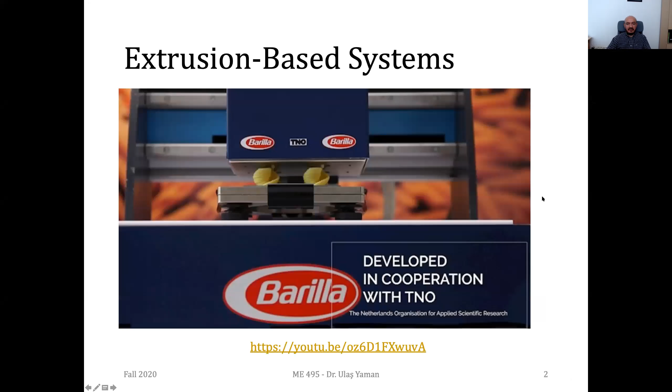We were discussing extrusion-based systems in the previous week and covered the fundamentals. We watched some videos, and I'd like to show you another one, a bit different from conventional desktop printers.

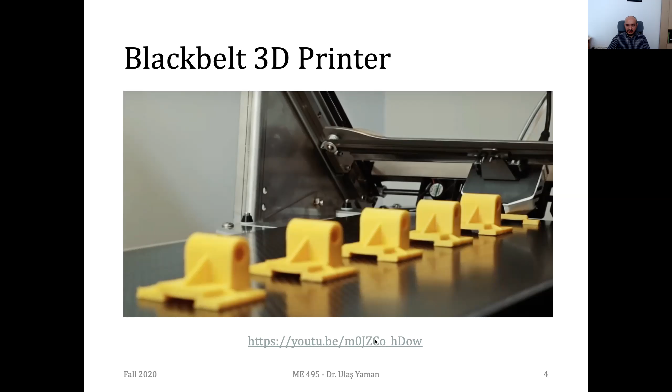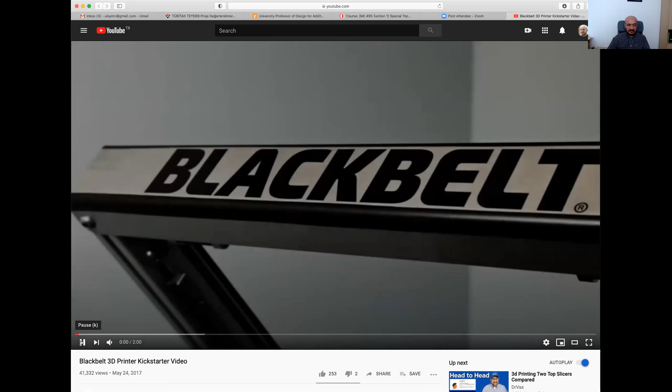2013, President Obama said, 3D printing has the potential to revolutionize the way we make almost everything.

This is actually the main difference: they don't have a conventional Cartesian X, Y, Z coordinate system. This is a bit tilted. This is again our extruder head, but this time it's not printing on an XY plane. It's printing on an inclined plane, about 45 degrees. The advantage is that the building plate is moving, like a conveyor belt, continuously in this direction, which means this inclined plane allows continuous material extrusion.

You can also see similar items here, the fans, which are for cooling. They have a special bed - I'm not sure whether it's heated or not - but it has special patterns so the material can easily stick to this conveyor belt.

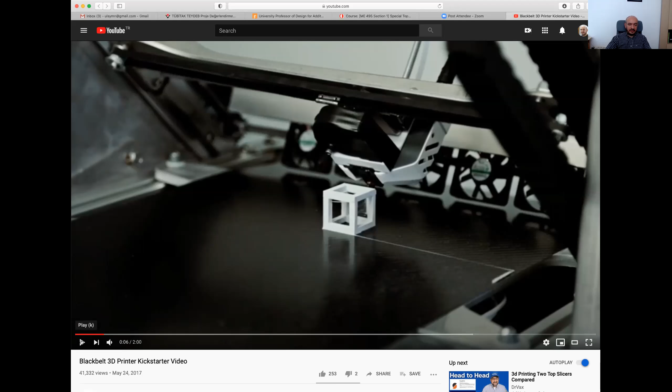Revolutionize the way we make almost everything.

Indeed, 3D printing has become a technology that will change the way we produce things. They can easily produce longer products since they don't have a specific build volume. They have some limitations on size, but for the length of the part, there's no limitation.

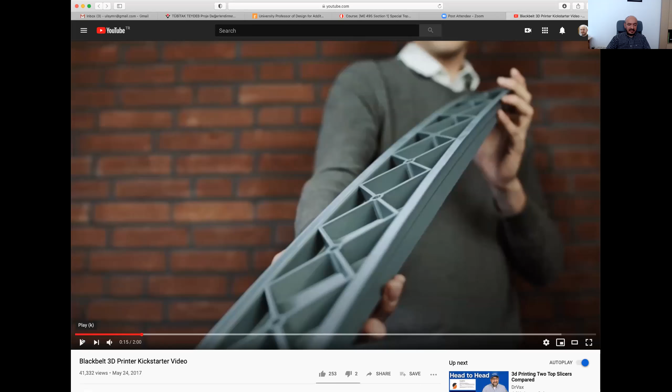However, there are still challenges that prevent 3D printers from entering the industrial landscape. Blackbelt 3D has addressed these challenges. You can assume this is their kind of X and Y axis - obviously inclined, but the fundamentals are the same. The main difference is on the bed side: it's moving all the time, not stationary.

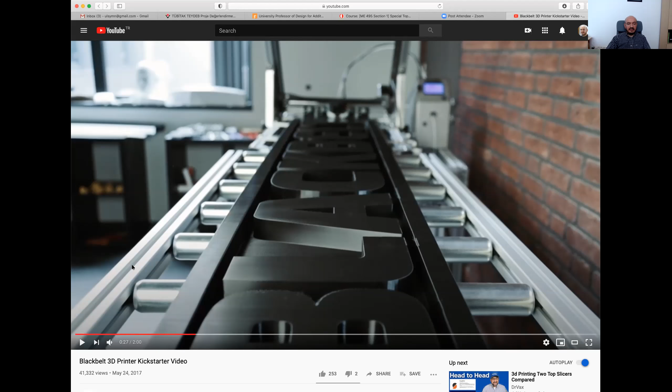Started from scratch to redefine. They have a huge part - this is their name, Blackbelt 3D printer. They printed this part in a single operation using fused filament fabrication technology. We are proud to present you the Blackbelt industrial production platform.

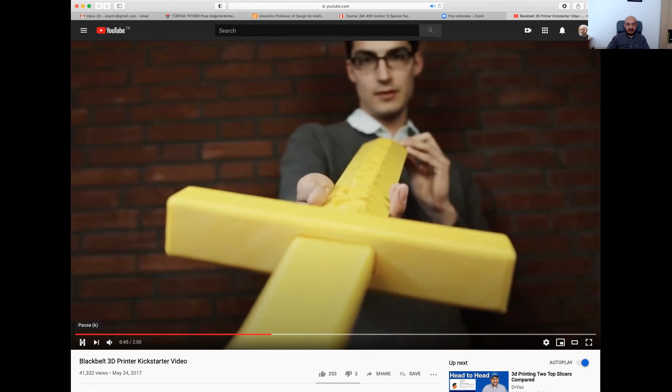But what is so special about this new printer? Hi, my name is Stefan Schirmer, I'm an inventor and industrial design engineer. For the past 2 years, my job was to apply 3D printing to industrial applications, but the limiting factor was always how the existing technology works. That's why I developed the Blackbelt. This new patent-pending technology is capable of manufacturing very long products with unsupported overhangs, and also mass production right away.

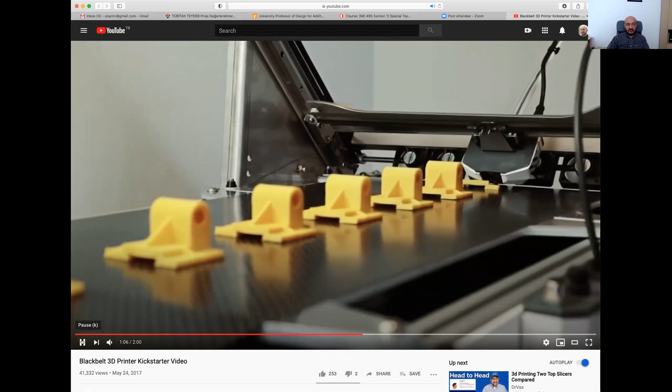You see an example of mass production. Since this conveyor is always moving, we can print many products one after another, and you don't need to restart the printing process since it's already sliced. It's probably using the same motion data, just this belt axis is moving.

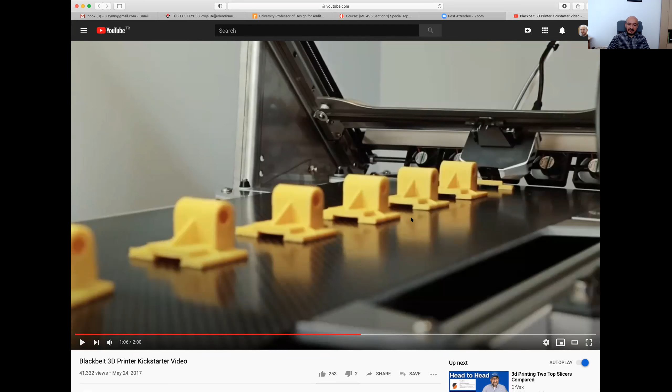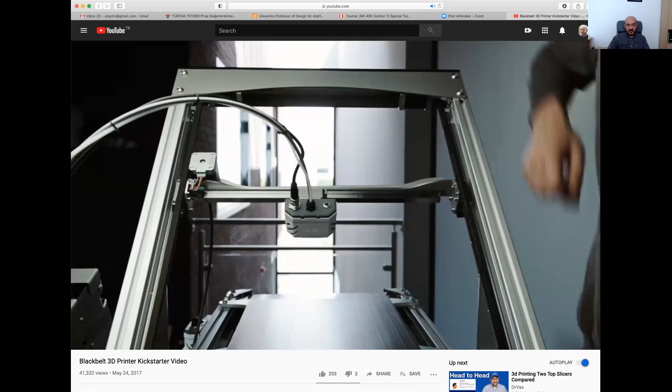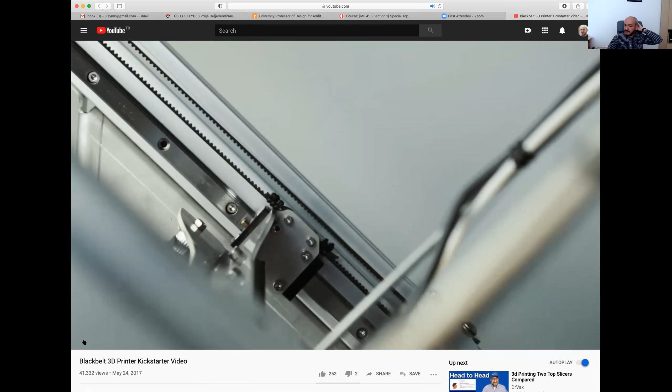By the way, which is a breakthrough in terms of 3D printing. Imagine what you could be producing with this new production technology. Together with selected experts in metal conversion and assembly technology, we have engineered a production-ready machine using industrial quality parts. This is not just a concept - we have developed a market-ready machine that is tested and ready for production. We have decided to launch on Kickstarter to finance the first production run and develop user-friendly slicing software that goes along with the Blackbelt 3D printer. This is why we are reaching out to support our project, allowing you to become first in your industry branch applying this state-of-the-art disruptive technology.

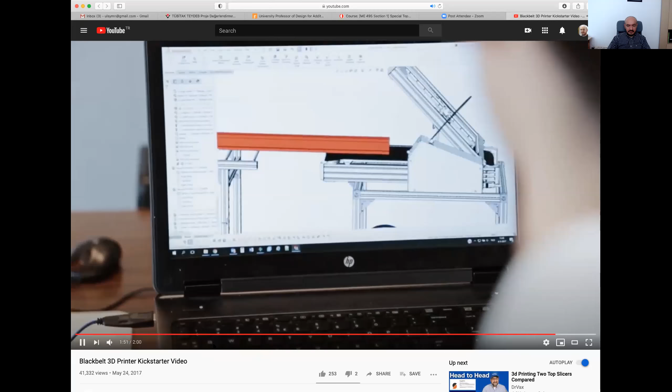So this is a nice example for mass production. Now I will show you another example that's a bit different.

This is called programmable filament. What they do is first print the filaments. In the previous week, I mentioned that usually at the back or beside the printer we have spools of filament, especially for desktop fused filament fabrication printers. But here they follow a different scheme, a different paradigm. They use a printer to print the filaments themselves, printing colored filaments by changing material from time to time, joining these colored portions properly.

Then they remove this printed filament and use it as the new filament for the next print. With that approach, they are actually printing colorful objects. In conventional fused filament fabrication, we use a single spool of material with a single color, but with this approach, they can print colorful prints.

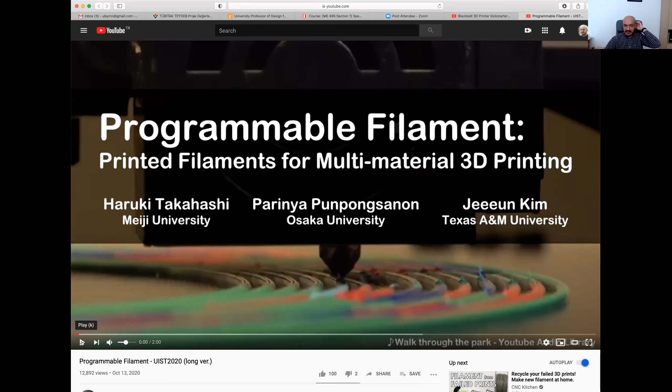Now we will see the details. So this is quite weird - they are printing the filament, which is to be used again in printing another object.

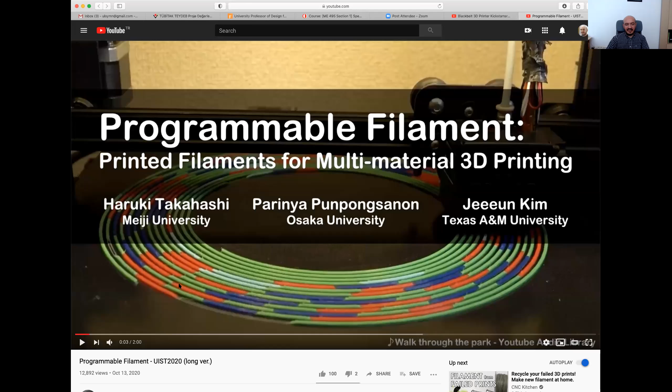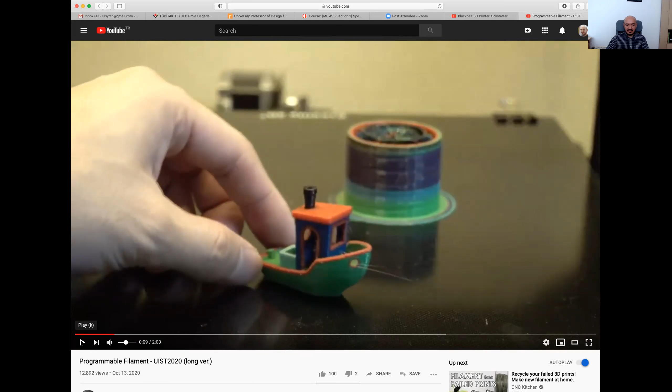Now the filament is ready, so they will use it for the fabrication of a colorful object. If you use the conventional approach, this benchy would be a single color, but right now it has many colors.

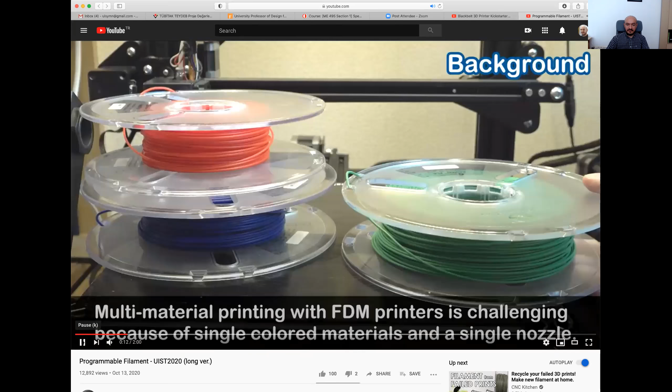So this is the conventional approach. They do manual exchange of colors.

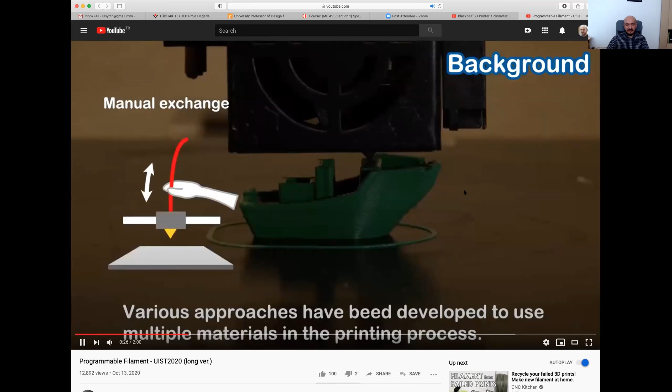There are also some equipment in the market, I think the name of the company was Palette. They input colored filaments into their equipment and then extrude that color.

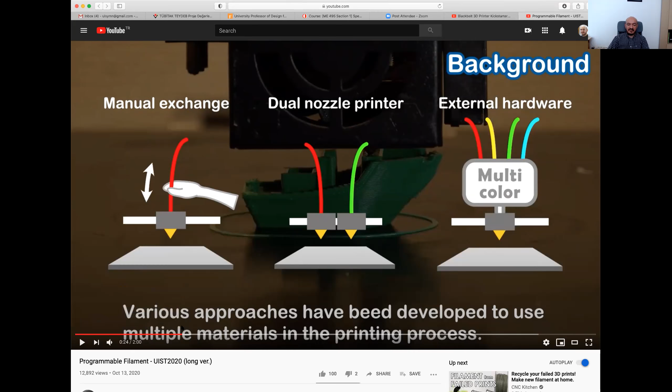But right now what they are doing is printing a single spool of colored filament and then using it for the fabrication of a specific product. Their disadvantage is that they cannot use this colored filament for fabrication of another object. It's especially programmed for the printing of that benchy.

So this is how they're doing it. They have inclined regions to try to make sure that the colored regions stick to each other well.

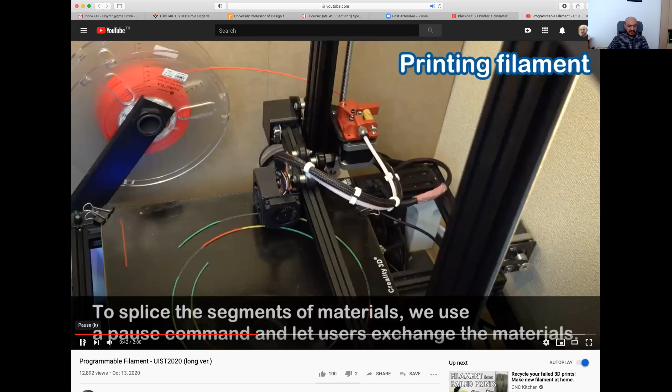But that's the main idea.

Obviously, they need to have proper software. This is their simple software right now. They arrange the colors and tell you when to stop and install a new material. But obviously, this is quite complicated.

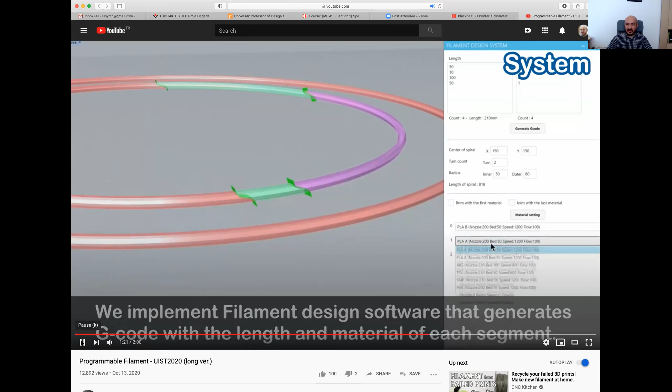In the software, you select the regions of your part to be printed in different colors, and then their software, as you see, generates the regions for this colorful part.

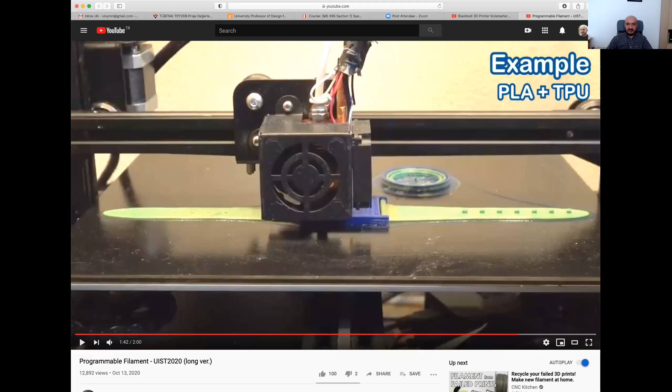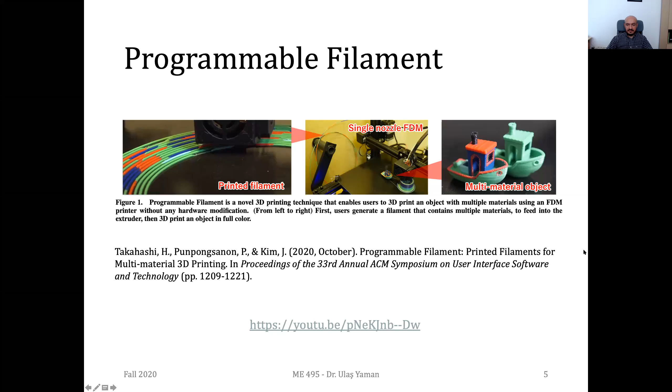So I can continue with the rest of the chapter. I'm not going to spend time on this introductory part.

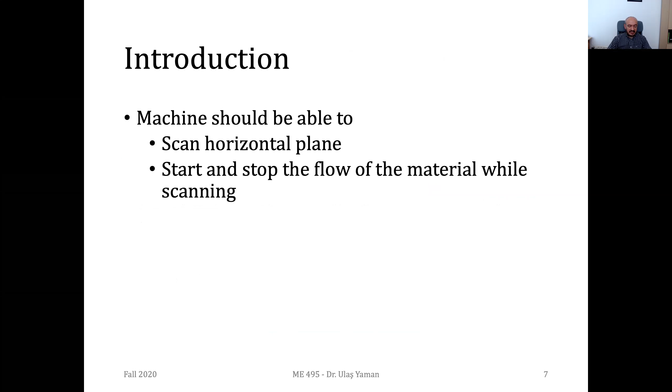We said that these extrusion systems should have some horizontal scanning equipment. They should be able to stop the extrusion, start it, from time to time. And obviously, since it's a layered manufacturing, they should be able to move upwards and downwards.

We may do the extrusion by using some chemical materials which are used to melt or solidify the material. In the most conventional way, we use temperature control.

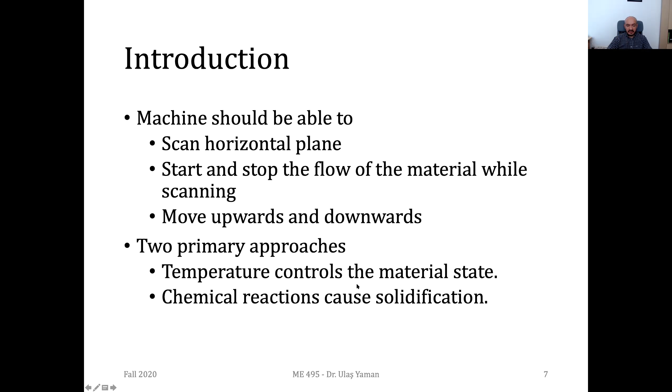So we said that there are some basic principles. What are they? We need to load the material by using some kind of pusher or maybe some pressure sources, or by using pinch rollers.

Once you have a filament, with the help of these rollers, we push this filament into the heating chamber. And then in that heating chamber, we liquefy the material and extrude it onto the bed.

If it's the first layer, it will be extruded on the table, on the bed, and it should stick to the bed properly. Or if it's the next layers, then they should stick to the previous layers.

And obviously this plotting should be done in a controlled manner. The accelerations, the decelerations should be set properly. Otherwise, you may have some extra material all around. This will decrease the quality of your product.

And sometimes, depending on the complexity of your part, you need to generate some extra structures to support these materials which are hanging in air.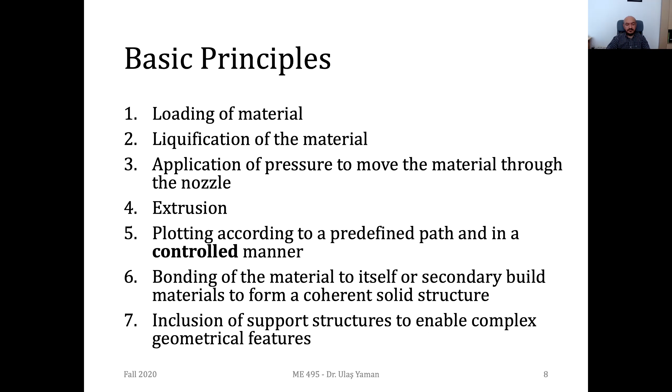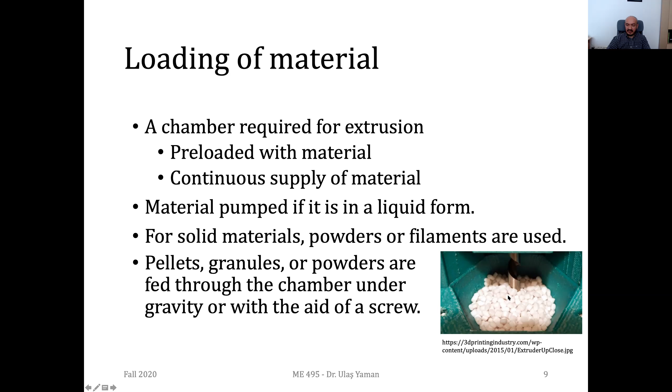These are some details. We discussed that instead of having just pure filaments, you may also continue directly with granules, but there you need to have an extruder inside, this special screw inside your printer, to fabricate your parts accordingly.

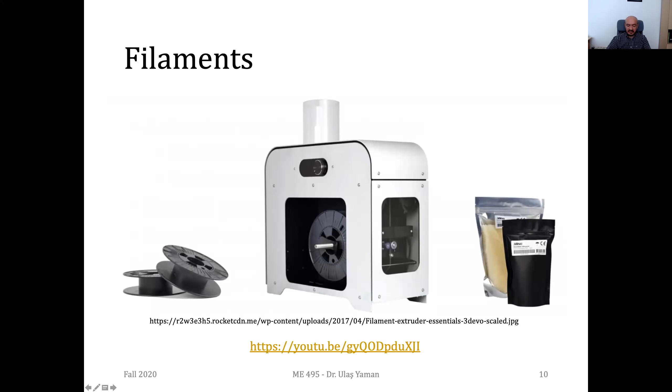And we have seen an example of fabricating filaments. We start with granules or pellets, and then with the help of it, we can generate our special filaments.

These are details for the liquefaction. We discussed the extrusion process. We said that the flow on the printer depends on the pressure we are applying on the heating chamber, the nozzle geometry, the nozzle opening actually, the viscosity of our material, and the temperature.

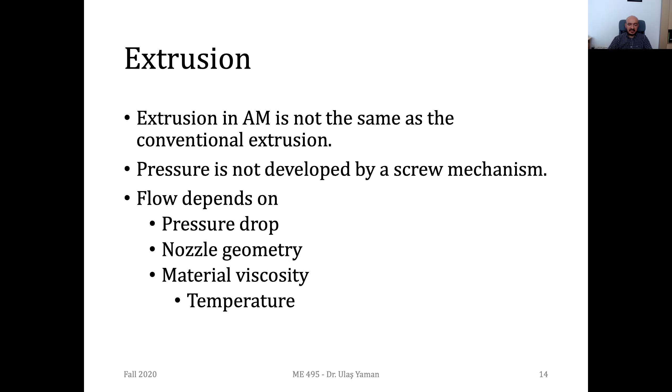Since we know that the viscosity of the material changes with temperature.

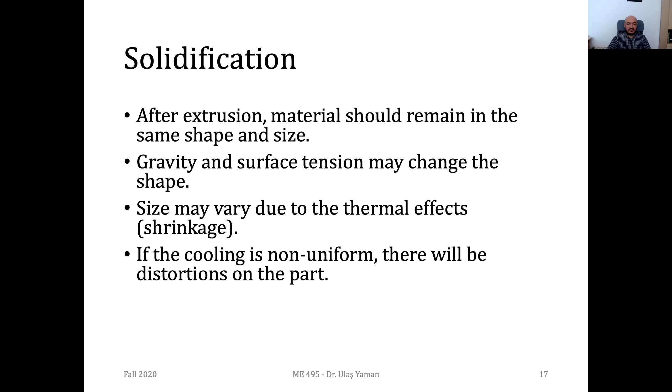Then we said that solidification is quite important, since for dimensional accuracy, if you cannot satisfy the solidification properly, then your accuracy will be very low. You will not be able to control the size of your products.

Then we said that for position control, for cheaper systems, we prefer to use belts and stepper motors, but for professional systems, we prefer to use lead screws and servo motors.

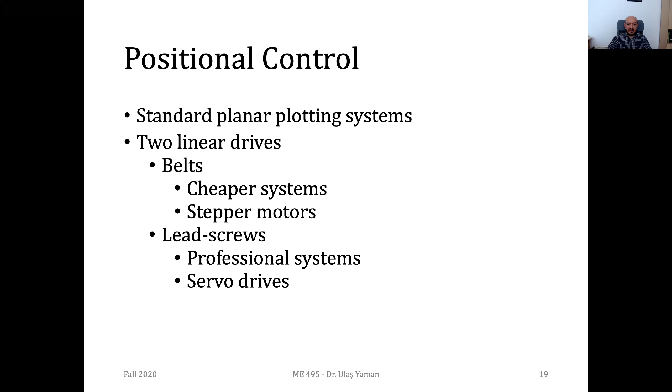This was an example of a novel technology for plotting systems. And we said that we prefer to use lower speeds while printing the outer profiles, since these are the things, these are the materials actually we will see once we have the parts.

And for the interior, we can use higher speeds since we want to decrease the fabrication time, and since the interior is not visible, you can always use higher speeds.

Another issue we discussed here is that we prefer to have as continuous paths as possible, since continuity will decrease the time spent on fabrication, and also it will increase the quality.

Since if it's a continuous path, that means we are not stopping the extrusion or restarting it again. In a continuous path, we will do it just once. We will start and then complete the whole layer and stop the extrusion.

So with such an approach, we will not always have extra materials around, and the overall quality of the print will be much better.

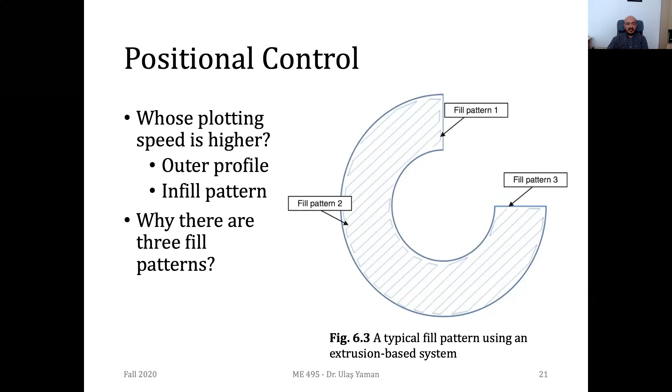And then we have discussed the bonding. Bonding is important, since if you cannot bond the layers properly, then if you have some shear forces, you can easily break your part maybe into some smaller parts. And you need to actually apply the required energy.

We have a critical level for this energy. If you apply less energy, then you'll not be able to join these layers together, since the previous layer will not be melted a little bit. But if you have high applied energy, then the temperature of the previous layer might be increased too much, and we may melt more material. So that's another issue, and you will lose the dimensional accuracy. So the thing is that you should apply the required energy, not less or more.

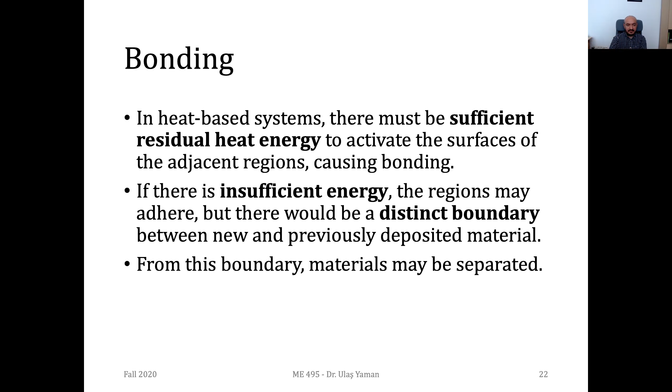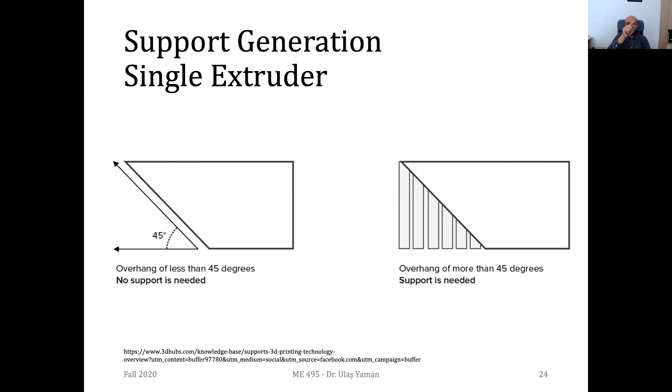And we discussed the supports. So if you have some shallow angles or some overhanging parts, we need to support them from underneath these regions. We said that if you have an overhang angle of 45 degrees or less, then that's fine. You don't need to have special support structures, but if this overhang angle is more than 45 degrees, you need to have support structures. But if you want to keep the quality of your surface, then it's better to decrease this angle, otherwise you will see some staircase effect on that surface.

These are examples of support generation. You don't need to generate, for letter Y, if the overhang angle is equal to 45 or less, but if it's higher than that, you should generate support. In the CAM software, like Cura, there are also some settings. You can change this angle, let's say from 45 to maybe 60 or 70, it's up to you, if you are accepting the low quality on these surfaces.

And sometimes we have such bridges, as in this letter. If you consider a layer at this point, after this part is printed, your extruder will jump to the other island, and while going from this island to the other one, you may extrude some material in air. This is up to you. If you don't want to use any support structure, then...

Sorry, trying to open this tablet.

So there are such options. You may not use support structure, but the thing is that once you do the printing, you will have overhanging parts, and you'll have a kind of bend here. If it's unacceptable for you, then you may do your prints using support. But if this length is not too much, if the length of your bridge is, let's say, 1 centimeter, then you may try not using any support structures, since with proper cooling, your printer may have less bending here. So this is a nice issue, and you may consider it while designing your part. If the bridge length is not too much, then you may continue without using any support structure.

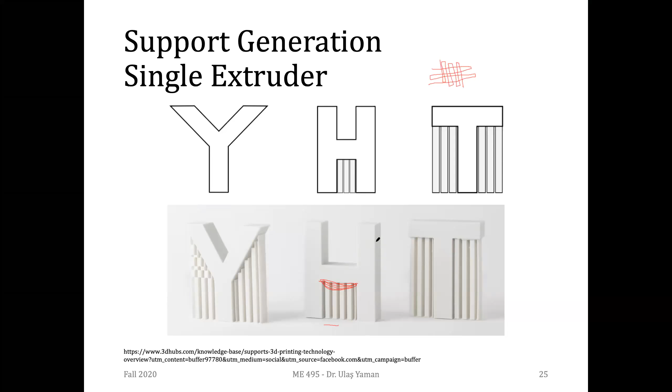We have default values, and this default value is usually around some 3 millimeters. But if you want to try, you can change it in the advanced settings. It's not available in the default settings, but if you are interested, you may switch to open some extra setting parameters and try to play with them.

But obviously, there are also some material properties that are important. The viscosity of the material, the speed of your fans, the quality of your fans are highly important. If you don't want to support this one underneath, then once you do the extrusion, this material should be solidified as soon as possible.

For the solidification, we should have more air flowing, and the temperature of the air should be as low as possible. So if you have proper forced convection, then probably the quality of your bridge will be a bit better.

But if it's longer, let's say 5 centimeters, then it's unavoidable—you should use support structure underneath. If it's around 2 to 3 centimeters, maybe by proper settings you may avoid using support structures. But if it's longer than 3, then for sure you should use some supporting structures underneath.

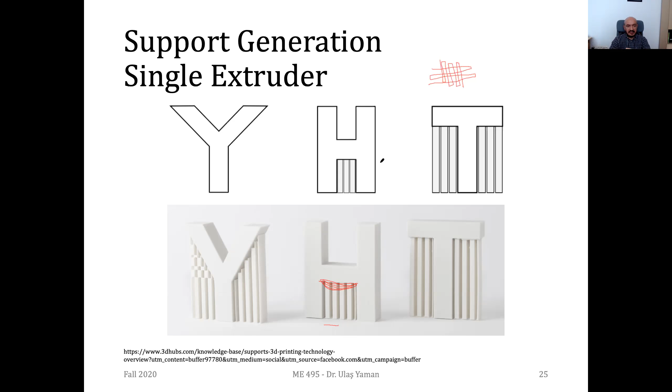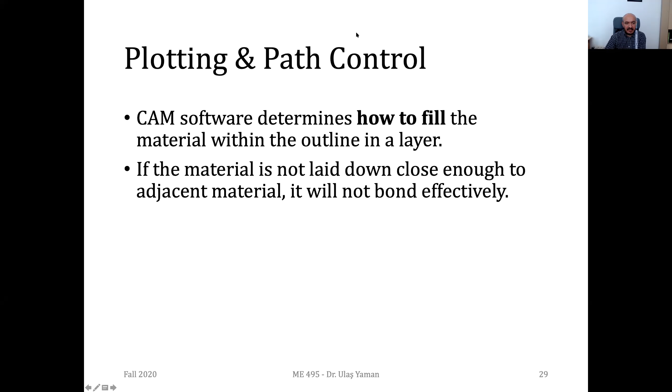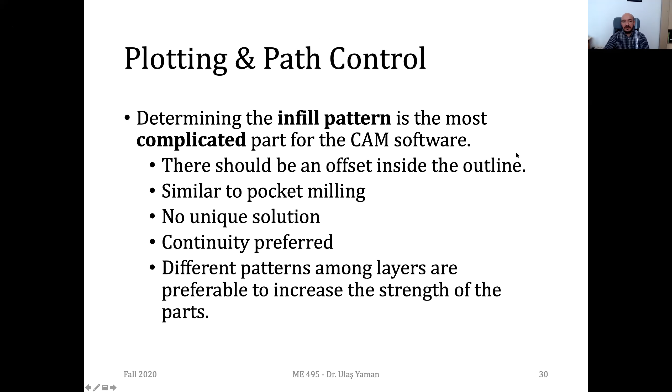And the extrusion, we said that depends on many parameters like these. Yes, I think we were stopped at this point, but we just have 5 minutes, unfortunately. Let me go through it briefly.

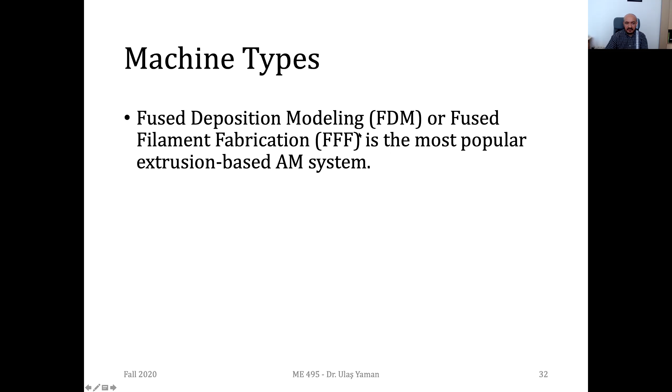First of all, we have 2 names for the most popular desktop 3D printers. The first one is fused deposition modeling, and the other one is fused filament fabrication. This FDM is the trademark of the first company who actually invented this technology, Stratasys, but we prefer to use fused filament fabrication since this is the name given by the standardization organization, the ASTM. So we'll be using FFF or fused filament fabrication for the rest of the semester.

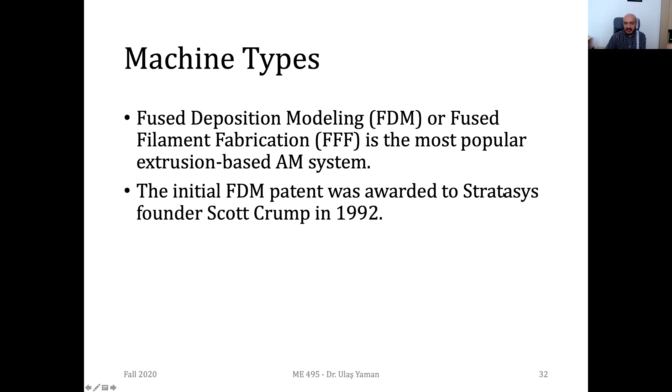And the first one, or the patented one, was invented in 1992 by Scott Crump, and he established his company called Stratasys. But as I said, we'll be using FFF for the rest of the semester.

And FDM is quite popular since the desktop versions are quite cheaper after the patent expired. Another advantage is that it's one of the methods giving you the strongest objects in terms of extrusion-based additive manufacturing systems. The other extrusion-based systems are producing parts having less strength.

And the main drawback, main disadvantage of the method is that it's a bit slower compared to other additive manufacturing technologies, but it's still useful. We can print smaller parts or very large products.

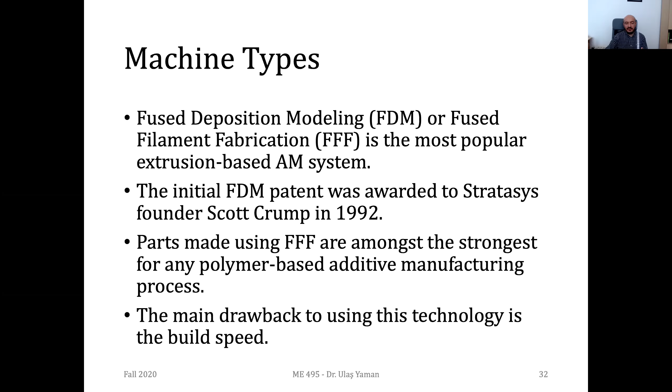And in these FFF systems, we mostly use ABS material or PLA material. The first one is acrylonitrile butadiene styrene, or the other one is PLA, polylactic acid. And I mostly use PLA.

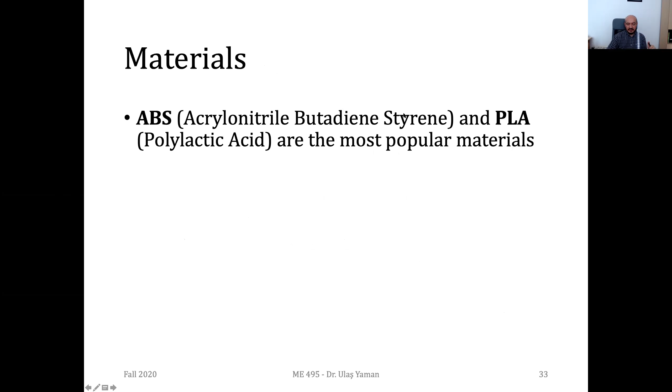It's biodegradable and it's much cheaper than ABS. But the main disadvantage is that it has less strength compared to ABS. Also another disadvantage of ABS is that you cannot print it without a heating pad, since its sticking is quite difficult—you need to heat the bed to maybe around 70 degrees. Another issue, you may even need to use a special glue or ABS glue, or maybe some conventional glues might be used on your bed so that your part will stick to the table properly.

And here's some typical values from Stratasys company. The tensile strength, tensile modulus, the elongation is usually around as you see, but depending on some variations of ABS material, it might be about from 3% to 6%. And the heat deflection, as you see, after usually around 70 degrees it starts bending, so you cannot retain its shape after 70 degrees.

Let's have a look at another popular material. As I said, the PLA material is usually good, and it satisfies most of your requirements. I use PLA material about 95% of the time. It has enough strength, durability, not perfect impact resistance, but it's good enough. It's very useful for consumer products, some toys, some smoother layers.

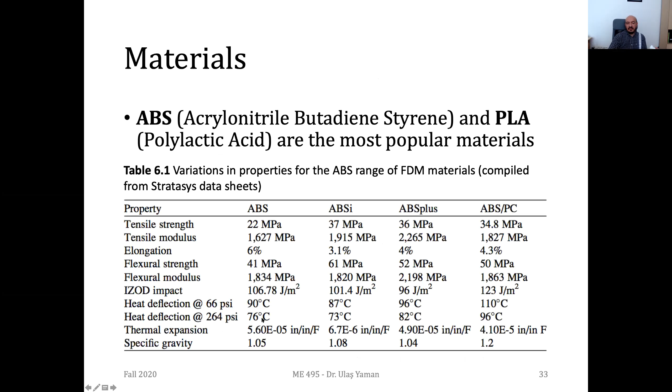Another issue is the glass transition temperature is a bit lower than ABS. This is around, I think, 50 to 60 degrees, so you shouldn't leave it under sun in summer times—then probably it will lose its dimensional accuracy. But its flexibility is quite low; it has quite brittle behavior.

Another advantage compared to ABS, you don't need to have a heated bed. For most of the time, without using any heated bed, you can print PLA material—you can print it on maybe some tape, some special paper, but you don't need to heat the bed. And once you have all these settings, the temperature, the bed height, then printing is not that complicated as we have done in the previous week. In some seconds, in some minutes, you can do the printing.